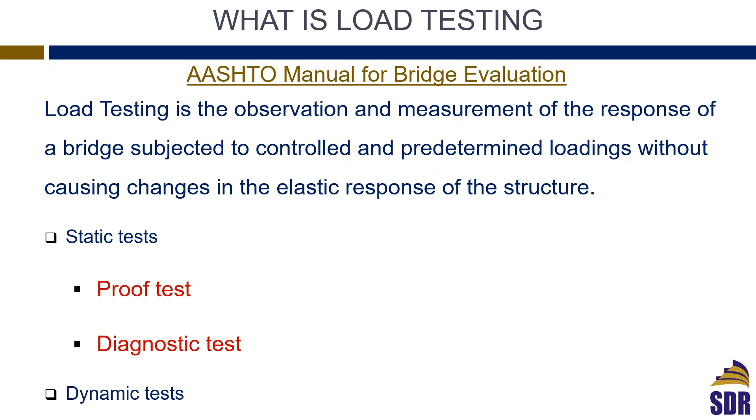So first of all, what is load testing? According to the AASHTO manual, load testing means we basically load a bridge with a predetermined load and then measure the response of the bridge under that controlled load to determine its response. Generally, load testing can be static or dynamic. I would say most of the time we end up doing the static test. The dynamic test is mainly done for purposes other than proof testing or diagnostic testing, and that's what the statics are meant to be. Why do load testing, or what is the benefit of it?

Basically, when we load test a bridge, we are trying to capture the actual performance of the structure. In other words, we are trying to determine the actual live load distribution between the different elements of the bridge. In addition, we are trying to account for factors we can never include in our design. Many of these factors are like the support conditions of the bridge, the unintended composite action that could happen in reality. Also, some secondary members like the railings, the parapets, the bracings, all these elements can contribute significantly to the strength of the bridge, as we will see today.

Also, unintended continuity, the fixation that may develop at the end of a slab span or a T-beam span, despite that you are designing it as a simple beam, and in reality this simple beam action or the knife edge support that we use in our analysis does not really exist.

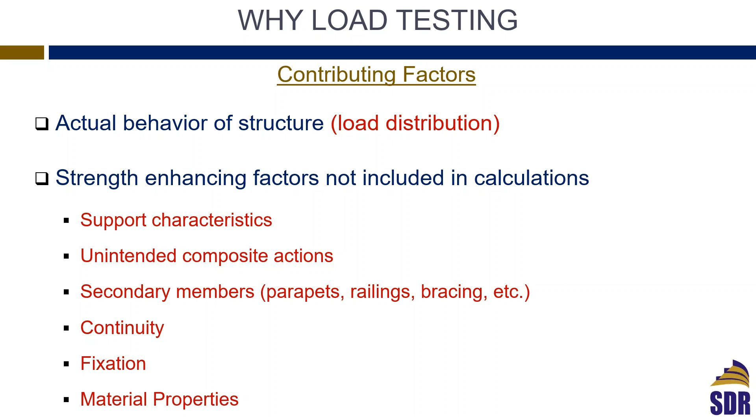And finally, also to account for the actual material properties that we design as 4,000 psi concrete, but the actual concrete strength will definitely be higher than that.

So what are the advantages of having a load test? The main advantage, and this is what we commonly do, is when we have a bridge that failed the load rating and it is determined that this bridge has to be load posted. In other words, we are limiting the actual live loads that can go on that bridge, since it has a load rating factor of less than 1.

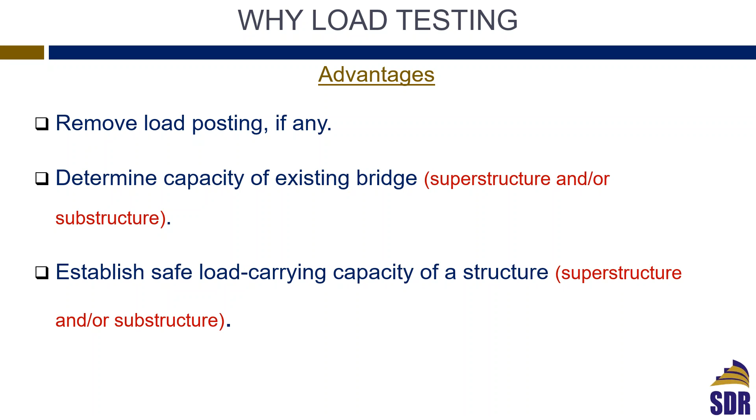Also, we can use it to determine the actual capacity of an existing structure or bridge, to see what is the maximum live load we can pass on it, and also establish a safe load-carrying capacity of an existing structure. Here in SDR, we do this structure evaluation process.

We have developed our procedures based on our extended experience in this area of bridge engineering. We do a condition assessment, and then after that we do our preliminary load rating analysis to determine what are the deficient members - is it the main girder, the floor beam, the stringers, the slab approach span - what elements are deficient that we are going to go test in the field.

After that, we will start with our preliminary finite element analysis. We develop a detailed model, as we will show later, and then go in the field to do the load test, then come back and validate our finite element model, and finally update the load rating analysis based on the findings from the field test.

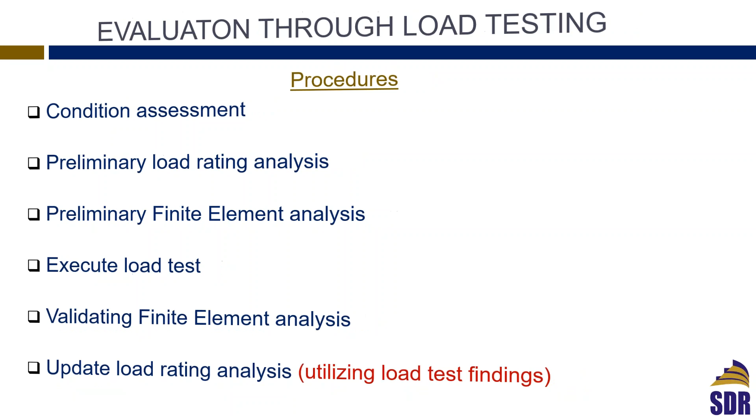So, first step, the condition assessment. As you are all aware, we start by doing hands-on inspection. That's very crucial - you have to go out and do a full inspection of the bridge, whether it's a steel structure or a concrete structure.

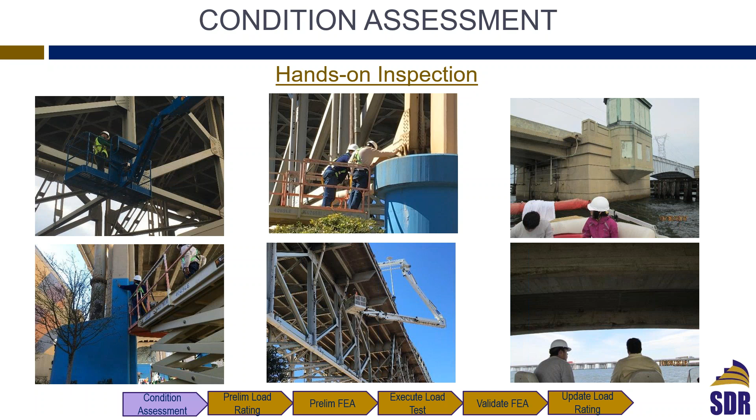As you all are aware, we can do the inspection from above the bridge using snooper trucks. It can be from under the bridge, also using a boat. We can access using man lifts, scissor lifts.

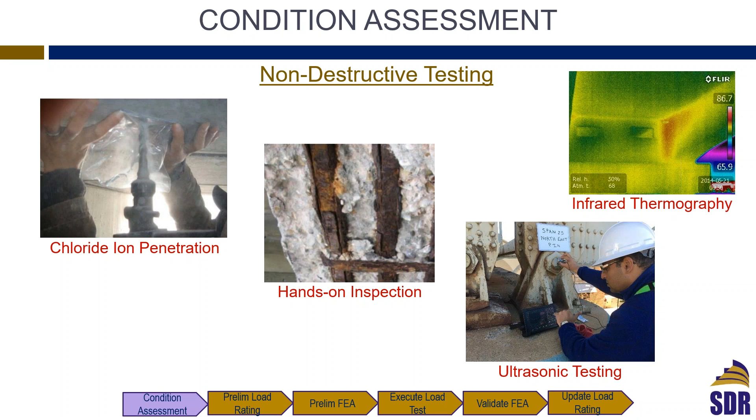Also, sometimes we might need to do non-destructive testing to determine some of the characteristics or material properties, which includes chloride penetration for concrete. Also determine corrosion, ultrasonic testing for steel structures or pins. We can also do infrared thermography.

Now, the second step in our procedures is to come up with a preliminary load rating. This is mainly a conventional load rating analysis, same as what we do for any bridge, using the AASHTO approximate analysis methods, and also using many software packages like AASHTOWare Bridge Rating.

We can do it with Smart Bridge, which is a software that we also develop in-house. It can be with MIDAS as well.

So you do the preliminary load rating analysis, mainly from this conventional analysis, which we typically do for any bridge. You determine what are the controlling spans, which members are the deficient members that we have to go and test in the field, and determine the rating factors of those members.

And most probably when we start, this would have already been in place, because this is meant for posted bridges. So for a bridge to be posted already, this preliminary analysis should have been done using the approximate methods of analysis.

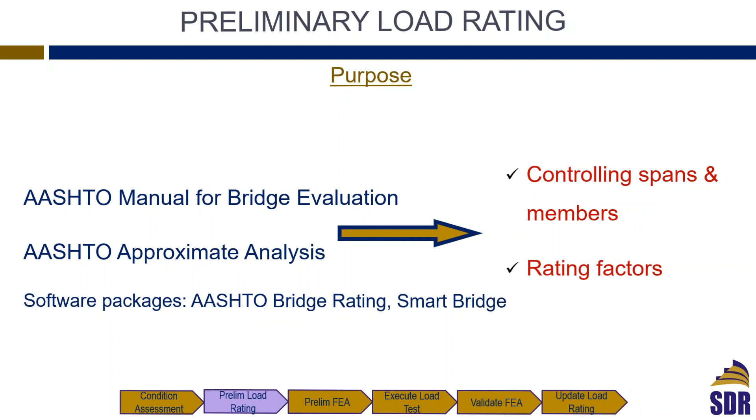After that, before going to do the actual test, we have to start developing our detailed finite element model. At this stage, this model serves several purposes. First of all, it's to determine the magnitude of loads that we can put on the bridge.

We cannot just go in the field and get a heavy truck and put it on the bridge, ending up damaging the bridge while testing. So that's a very important point - we have to determine what is the magnitude of the loads we can impose on the bridge.

Then we have to determine what are the safe limits of deformation and strains. So while we are testing, we have to do on-the-fly verification to make sure that the strains we are measuring make sense or are comparable to what we are expecting. And that mainly comes from the finite element model that we developed before going to the field, to determine what are the expected strains, so we can do a live comparison while testing to make sure the gauges are working properly, we are not overloading the bridge, and the measurements we are taking in the field make sense.

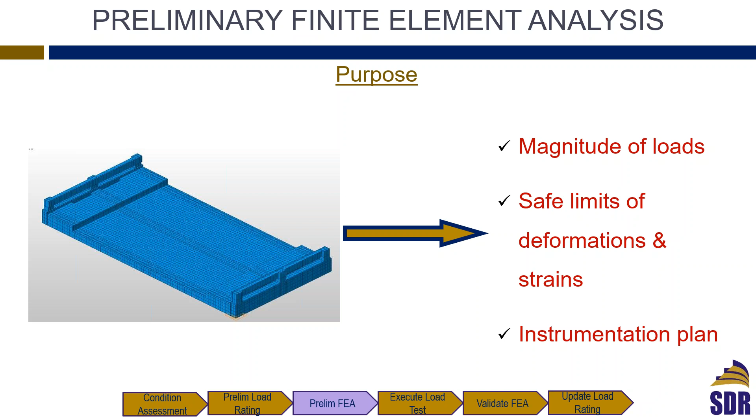Finally, we develop an instrumentation plan by identifying the deficient members to see exactly where we have to place our gauges, whether at the end, mid-span, positive moment, or negative moment. Depending on the deficiency of the member determined from the load rating and the preliminary finite element analysis, we come up with the instrumentation plan for our gauges in the field.

Before going to execute, the finite element analysis has to be fairly detailed. We are trying to capture the actual performance of the bridge or structure as much as we can, so sometimes we end up doing nonlinear analysis and have to consider geometrical nonlinearities. We also use different types of elements, not just grillage or beam elements, but most of the time shell elements, plate elements, and solid elements as well.

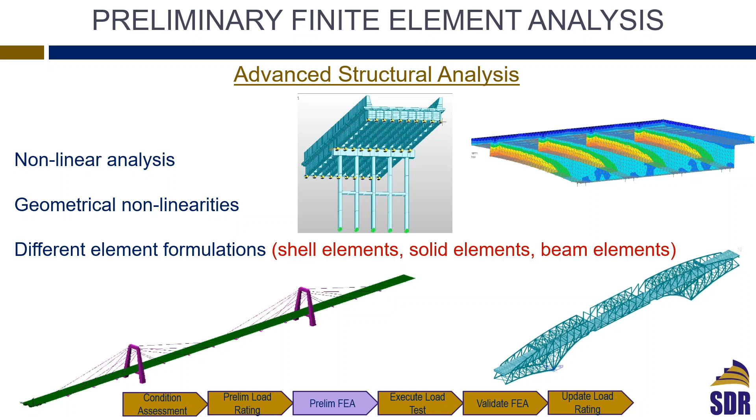In some scenarios, we might even have to consider soil-structure interaction, which is one of the nice features in MIDAS, where you can model your piles or foundation and represent the soil using soil springs. MIDAS actually has a built-in function for integral piers and monopiles or pile-and-column systems, where they represent the soil using lateral and vertical springs based on the P-Y curve method. The lateral springs are nonlinear and the vertical springs are linear.

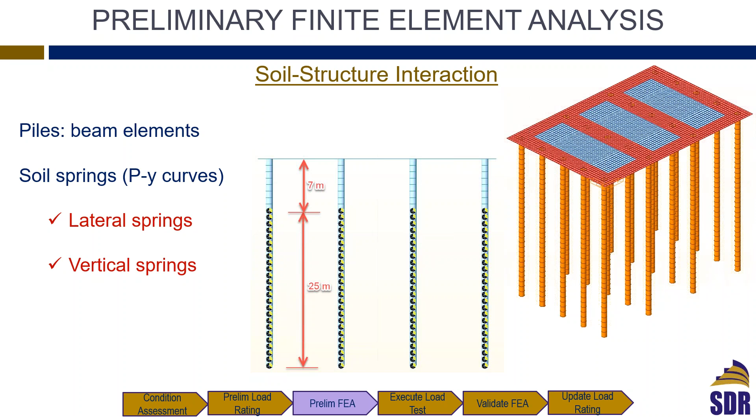This way you also account for the flexibility inherent in the system when modeling the foundation. You'd expect that a column modeled with a fixed base versus one modeled with the pile and soil represented will behave differently. The model with the pile and soil will be more flexible, meaning you might see more deformation, but your internal forces in terms of moments and shears might be significantly less.

Now, after that, we go to the field to load test the bridge. So how do we apply a load on the bridge, especially since these should be heavy loads? Most of the time we use dump trucks. We get them filled with sand or limestone, whatever we can get, and we take those trucks to weigh stations to determine the axle loads and the distance between the loads.

Most of the time those dump trucks were looking at 31 kip load for each axle, with about 4.5 feet spacing between the rear axles, and about 5 to sometimes 8 kip for the front axle. I want to highlight that those 31 kip axles spaced at 4.5 feet are very close to the HL-93 truck.

Actually, the HL-93 truck is 32 and 32 kip, but the rear axles are spaced at 14 feet. However, the design tandem is 25 and 25 kip, spaced at 4 feet. So the load we're trying to put on the bridge is very close to the actual design load of the bridge. In very rare situations, we might also have to use counterweights in addition to the trucks.

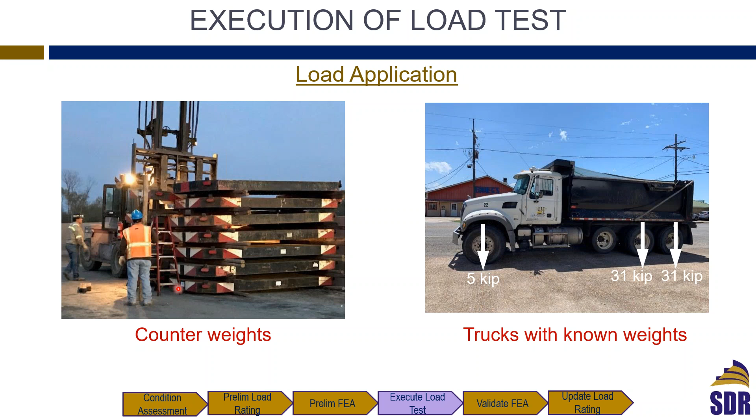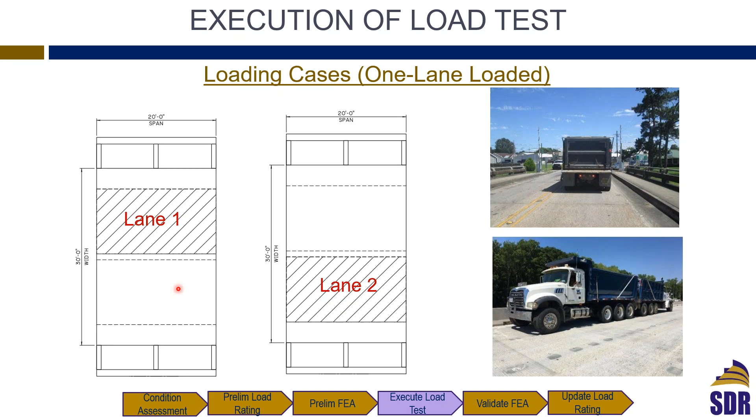Also, when we do the load testing, we have to be mindful of representing the actual design loads. So sometimes we do a one-lane loaded situation, running the trucks in one lane, and then also a two-lane loaded situation, same as we design the bridges for one lane loaded and two lanes loaded.

After we do the field test, for the load, do we go in the field and apply the maximum load on the span? Taking this simple span slab as an example, we're interested in it since slab spans are typically governed by their flexure strength. So we're looking at the mid-span moment for this simply supported slab. Do we go and apply the maximum load on this span to produce the maximum moment at mid-span?

I don't think that's wise. You'd like to apply the load incrementally. But how could you apply the load incrementally? We do this in a smart way: we start moving the load, moving the truck on the span. Your mid-span moment, your maximum moment, is under the load. Once you start moving the truck in and out and getting closer to mid-span, you increase your mid-span moment and your moment under the load. You keep moving the load until it reaches mid-span, and this is what gives you the maximum mid-span moment.

So we are incrementally increasing our load and taking measurements at each step. While taking those measurements, we compare them to what we expect from our preliminary finite element model, to make sure we are not overloading the bridge. The load has to be applied incrementally in both the one-lane loaded case and the two-lane loaded case.

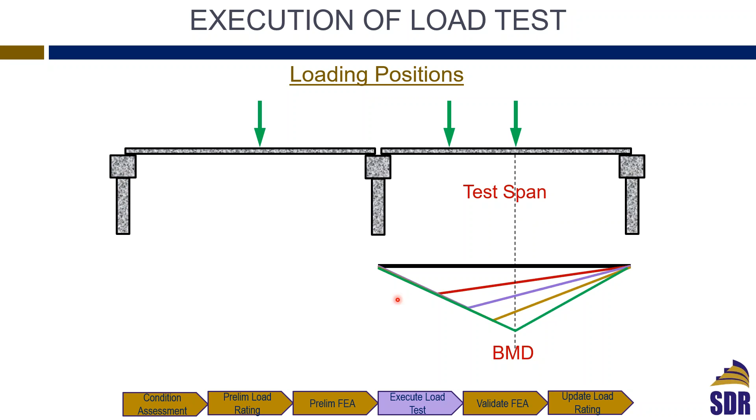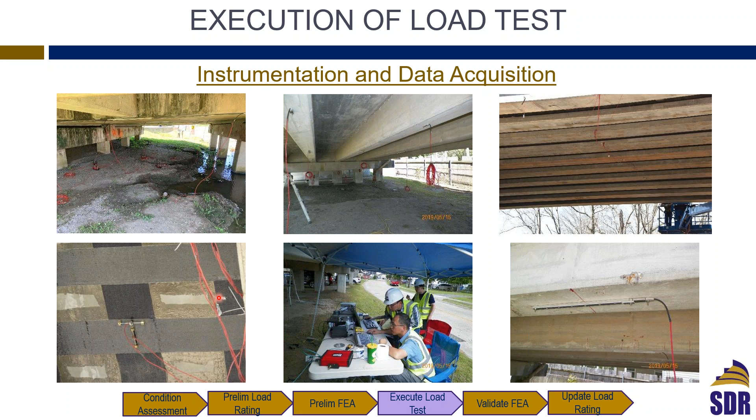This instrumentation looks nice in pictures, but there are a lot of challenges in the field. In some cases we can stand on the ground and access the spans to be tested. For other spans, we have to sit in a boat, or use a snooper truck or a man lift. There are challenges like how to access the bridge and when you can access it. If you're working on a swing span bridge, which can open while you're working, you have to secure all your wires. So there are challenges that come with instrumentation as well.

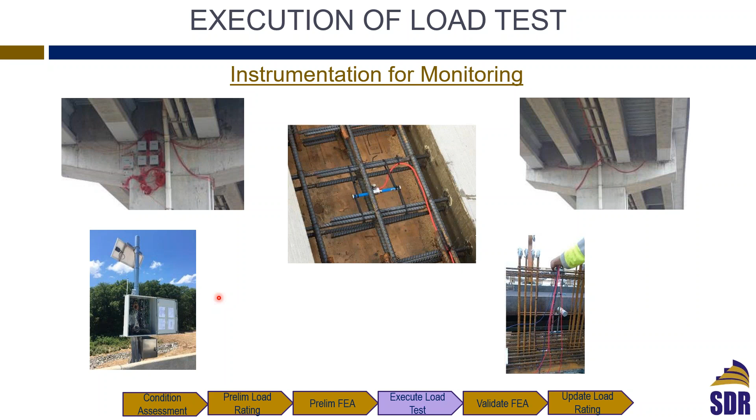Here are pictures of some instrumentation we did on a project, not only for load testing but also for monitoring the bridge over a certain number of years during its service life.

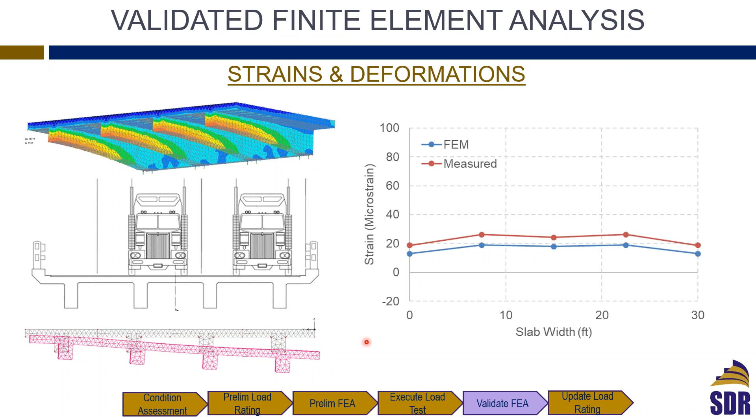After we take our field measurements, we come back and compare the field measurements to the finite element model, validating it by comparing field measurements to finite element strains. We do this by comparing stresses and strains, and also comparing the deformed shape of the bridge to what we expect.

Finally, based on the comparison between the finite element model and the field test, we come back and update our load rating analysis, mainly to refine our structural analysis assumptions to account for the current condition, and also to account for the boundary condition, which is a very important parameter. We might also end up updating our live load distribution factors, which we use from the AASHTO code.

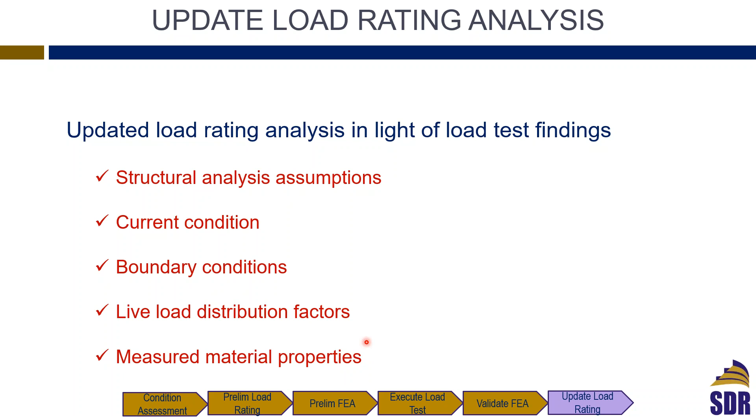These are approximate analysis equations that give you the live load distribution factors. For a specific bridge, we might have to come up with our own live load distribution factors, and also measure material properties if we have to determine material strength in the field.

Now I will start talking about the first bridge I'm presenting today. It's a concrete slab span. To give you an overview, this is a vertical lift bridge, a plate girder bridge that can be opened, and the entire load posting of the bridge was controlled by the approach slab spans. So this entire beautiful bridge is controlled by those concrete slab spans. Load rating the bridge using conventional analysis and conventional load rating techniques resulted in a load rating factor below 1.

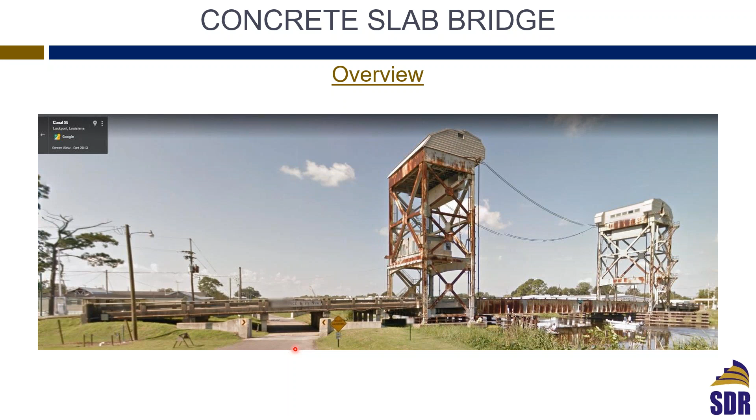Accordingly, the bridge has to be posted. This was an important bridge, crossing over a big canal, and now you are actually hurting the area on the other side of the bridge. So we have to go and do the load testing to determine the actual strength of that bridge and to see if we have to keep it load posted or not.

Just an overview: it has 8 concrete slab spans, each span was 20 feet long. It has 2 tower spans of 30 feet, and 1 vertical lift span that was 150 feet. We were interested in the concrete spans, so we didn't have to test all the spans, and since the 8 spans were identical, we had to load test one of those concrete slab spans.

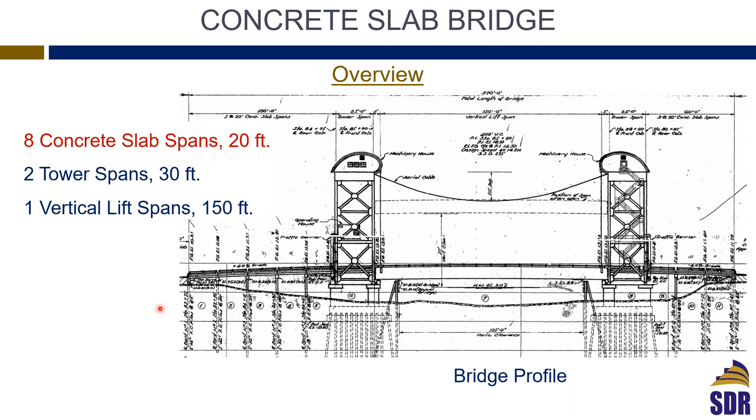To determine which span to test, that's part of the inspection that we do at the beginning. We determine the condition of the spans to see which one we are going to test, look at the current condition, how you can access the spans. There's a lot of parameters that have to be taken into account to determine which span you are going to test, to make sure it's representative of the 8 spans.

This concrete span was 20 feet long, and the thickness of the slab was 12 inches. The bridge has a 28 feet roadway, and a 5 feet sidewalk on each side, and the sidewalk was elevated as well. This was a cast in place reinforced concrete slab. The barriers, the concrete barriers, were also cast in place, and they were cast as part of the deck.

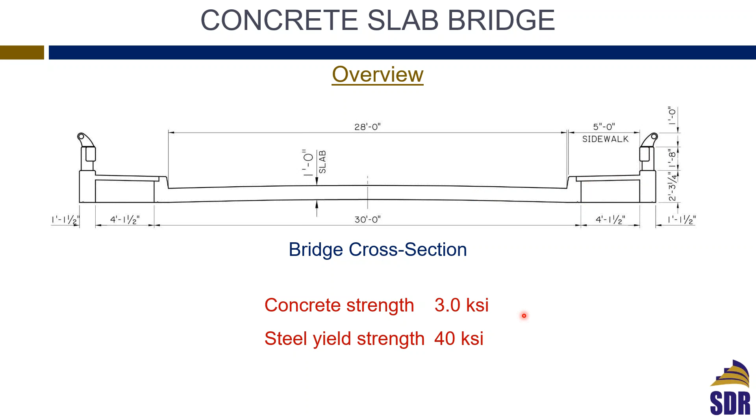This was an old bridge, so we're looking at a concrete strength of 3 KSI, and the yield strength of the reinforcement was 40 KSI. So we start this by developing our finite element model. Typically for the slab spans, we model them using brick elements or solid elements.

Modeling using the solid element is a little more complicated or sophisticated than modeling with shell elements or frame elements, but that's the only way you can capture the behavior of the bridge, given the fact that you have the slab, the roadway, then the sidewalk, which is elevated, and they had diaphragms supporting the sidewalks. The slab at the end is supported on the pile bent.

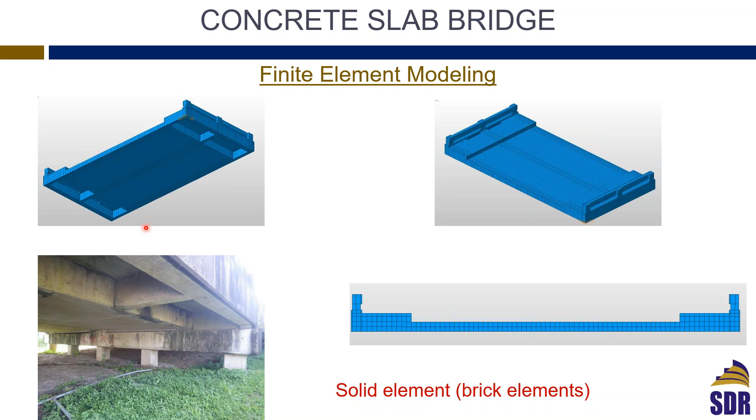So you can see the model we are modeling with the exact geometry for the bridge using solid elements. Even the barriers have to be modeled since they were cast in place, so it's an integral part of the bridge. It's not only the slab, but the barriers, the diaphragms, and everything. This model using the solid element has to match, I wouldn't say exactly, but as close as possible to the actual geometry of the bridge.

Now, the other trick in finite element analysis in general: boundary conditions are one of the most critical parameters that people can play with, and it can significantly change your results. I'm not talking about even structure evaluation, even in design.

Just from a structural analysis point of view, if you have a simple beam with a hinge and a roller, and a uniformly distributed load, your moment on this beam is WL squared over 8, with a hinge and a roller. Just put this beam on two hinges instead and try to calculate your moment and see what your vertical reactions are. Just as simple as that.

That's a challenge by itself. When you put a hinge and a hinge, you will end up having 2 horizontal reactions that will contribute to your moment. Just look at the strength of a beam that is simply supported on a hinge and roller, then go into your finite element model and change it from hinge-roller to hinge-hinge and see what happens to your beam.

So the boundary conditions, I always say, are like a lethal weapon. If you don't know how to use it, you can get results that make you happy, very small moments and shears, and you have beautiful structures. If you don't know, you can also end up having moments, shears, and internal forces that are not representative of reality. So we have to be very careful about boundary conditions, even for new designs.

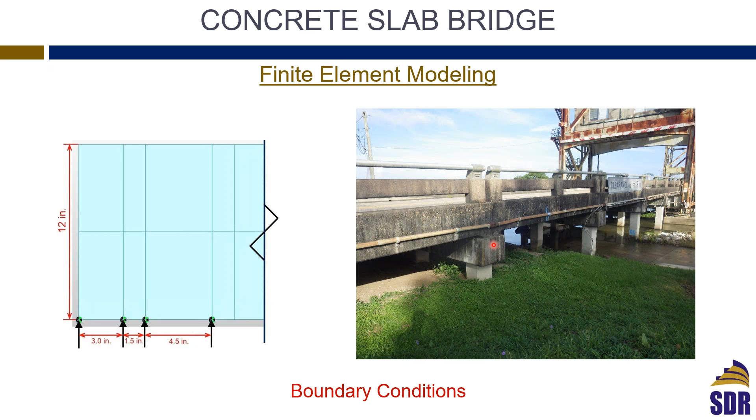But most importantly, you have to make sure you are preventing vertical movement along the area of the slab in that direction, since there was no bearing. This slab was sitting concrete on concrete, so this point cannot move upward or downward because of the bent cap.

Just to show you the instrumentation plan. For this specific bridge, we were instrumenting to measure the strain gauges, or the strains along the entire width of the slab at different locations.

If the span length in the longitudinal direction is 20 feet, the width of the slab was 30 feet. We had gauges at 1/4 of the span, mid-span (10 feet), and 3/4 (15 feet). We also had to measure the strain transversely, and we will show you why we are measuring strain in the transverse direction and not only along the centerline of the slab.

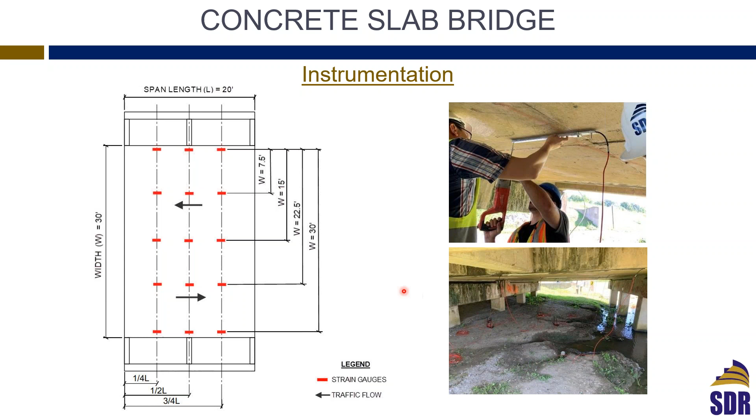Those pictures are showing where we're drilling to put the screws or anchors into the concrete so we can measure the strain in the concrete. This picture shows the wires coming from the gauge to the node, and these nodes are wireless nodes that transmit the data wirelessly to the base station.

The most important message we'd like to convey here is that as the load on the slab increases, the strain we're measuring has a linear relationship with the load, which means the slab is still behaving in the linear zone of the concrete, and the concrete is still uncracked.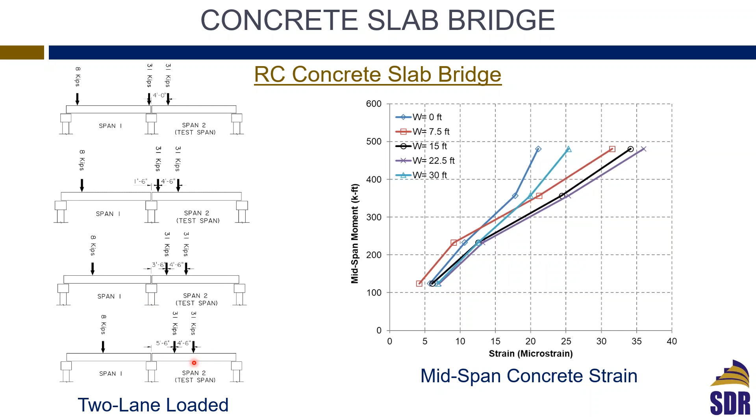You are calculating the maximum live load moment on the span, and the corresponding strain we measured in the field was 36 microstrain. The total dead load moment of the slab is 225, so the corresponding strain will be 17. So your total dead and live is 53 microstrain, and your cracking strain based on the modulus of rupture of the AASHTO is 132. This means that your total strain under dead and live load is less than the cracking strain, and this confirms why we are seeing a linear relationship between the load and the strain.

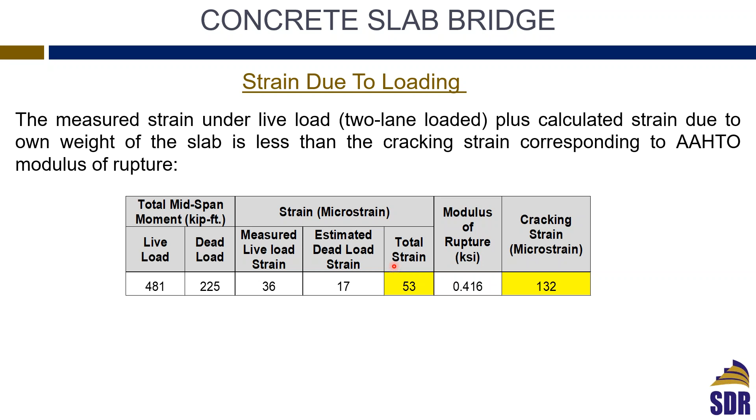So by hand calculations, or if you are following the AASHTO strip method to calculate the strain for this slab, the strip method simply assumes the slab is behaving as a one-way slab in the longitudinal direction, or between the two supports as behaving as one-way, simply supported.

Now, when you start looking at the results in the finite element, as we were expecting, you see that at the end of the slab, this blue contour, which is basically negative strain, meaning you have tension at the top and compression at the bottom. This means that if you took this strip as a longitudinal strip along the slab in the span direction, you would see what we assume as a simply supported beam with a positive moment. In fact, this strip develops negative moment, then you have positive moment in the middle, so it's more close to fixed.

I wouldn't say it's fully fixed, but there is partial fixation, and this partial fixation comes from the boundary condition, which represents the actual seating of the slab. As I said, this is one of the parameters when we design this bridge, we have to assume it is simply supported. That's the easiest way to design the bridge.

However, we are in a situation when we need to look into refined analysis and load testing to see if it's fair enough for this bridge to be posted or not, so we are not underestimating the capacity of the bridge. Based on our extended experience, we have always realized that bridges can carry loads much more than what we would estimate based on code equations.

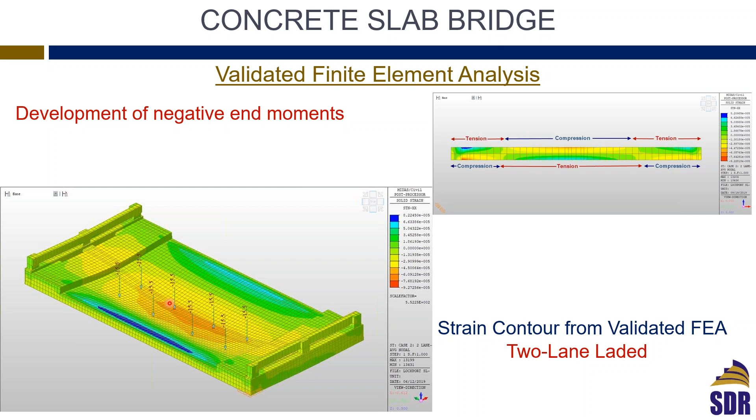And you can see that when we look at the transverse deformation of the slab. This strip is along the width of the slab. If the slab was acting as one-way only in this direction, you would expect that the deformation at the middle of the slab, or at the center line, is the same here, same here, same here, since all the load is running in one-way direction.

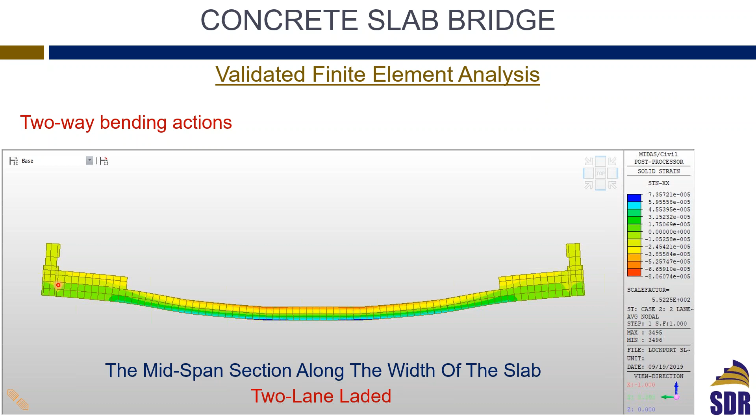Once you look in the transverse direction, you see that the deformation is changing, which means the curvature is also changing in the transverse direction, indicating that some of the load is also going toward the barrier, which then transfers to the support. So you also have a two-way bending action. So now we have two things: the negative end moment and the two-way bending action of the slab.

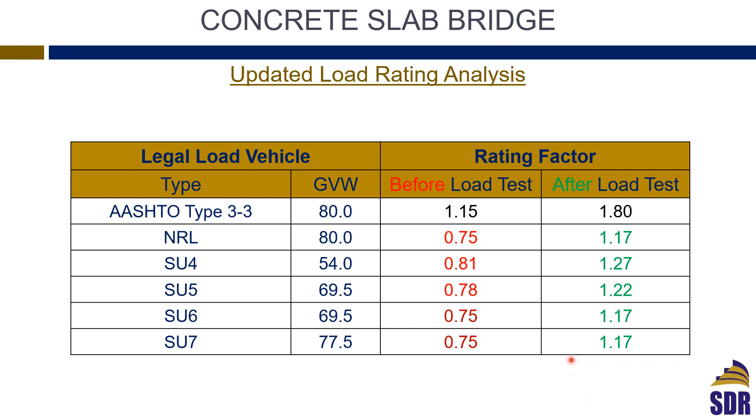Now let me move to the other bridge. I hope I'll remain on time. The other bridge we are looking at, and I'll make it quick so we leave some time for questions and answers, is a reinforced concrete T-beam bridge.

In general, reinforced concrete structures have a lot of redundancy inherent in them. They are not the same as steel structures, and maybe not even the same as precast concrete structures. In reinforced concrete structures, when we have a beam and a column, we simply assume the beam is simply supported and resting on the column, with a hinge and a roller. When we solve this beam, we develop a positive moment of WL squared over 8, as simple as that.

However, in reality, the connection between the beam and the column is a stiff connection, an area, so we cannot assume that this beam is simply supported and will bend as if sitting on a hinge. There will be some negative moment developed at the connection, and even the column will experience some of this negative moment. That's why the beam-column connection is one of the crucial areas we have to design for in concrete structures.

So by nature, concrete structures, especially cast-in-place reinforced concrete structures, have a lot of redundancy in the system. There is a lot of strength in these systems that we don't account for in our original design. Maybe it's not the same as steel structures, but even steel structures and precast concrete structures have a lot of parameters that also contribute to enhancing their strength without being accounted for in the design.

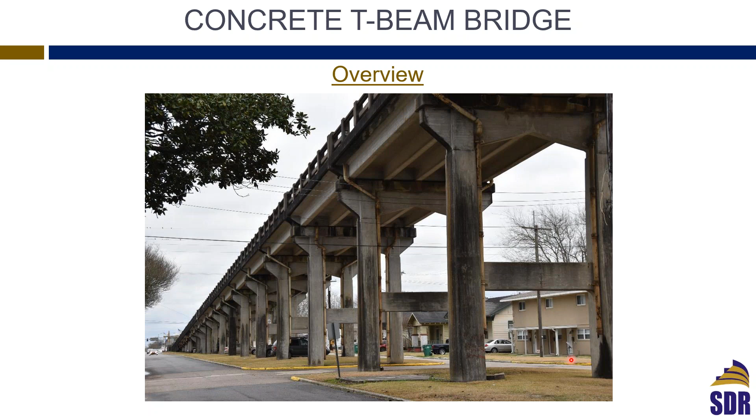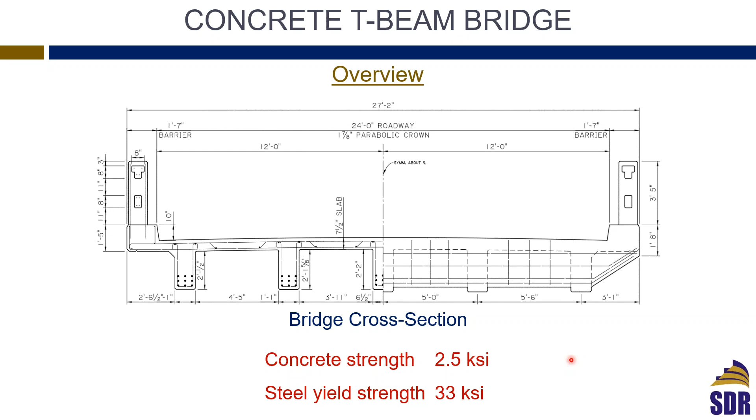So this was a T-beam bridge, a bridge that has reinforced concrete T-beams and a deck slab. The cross-section of the bridge had 5 beams across the width. It has a 24 foot roadway, so it's a typical 2-lane bridge with barriers as well, and a concrete deck that was 7.5 inches thick. It was also another old bridge that has a concrete strength of 2.5 KSI, and the yield strength of the steel bars was 33 KSI.

Again, we have to model the bridge in finite element, and we did that with solid elements or brick elements. Since the barriers were also cast in place and are an integral part of the bridge, we had to model them as well. We even included the cross or end diaphragms of the beams, the sidewalks, and everything, so the model is built to match the actual structure as closely as possible.

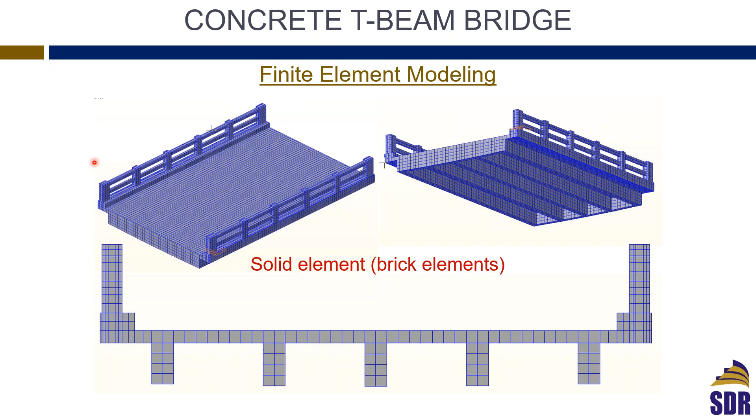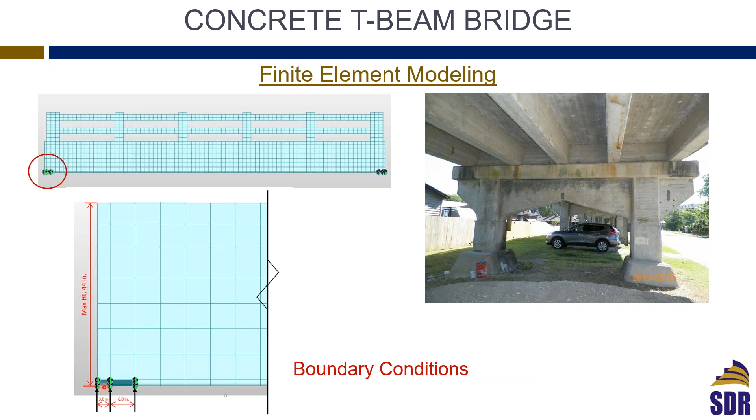Again, if you look, those beams are sitting on the pile bent or the bent cap, but they are not resting at one node. I zoomed in to show you the boundary condition: we had 9 inches of the beam sitting on top of the bent cap, and that's why we are preventing the displacement of the nodes along that 9 inch section of the beam.

In instrumentation for this T-beam bridge, we actually instrumented all the beams along the span.

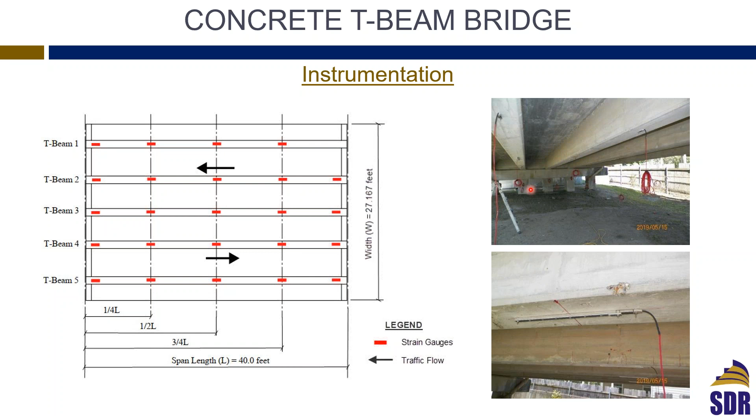So we had instrumentation at the end, quarter span, mid span, 3/4 of span, and the other end, and we instrumented the 5 beams. Just to show you some pictures of the instrumentation we applied on the beams in the field. And then we start comparing the finite elements to the measurements.

For the 2-lane loaded case, these beams had a span of 40 feet. With 40 feet, when you do the maximum position, you can get 2 trucks back to back, as you see here. So we're doing 2-lane loaded, which was the loading case producing maximum moments on the beam. These are the 2 axles of one truck, and these are the 2 rear axles of the other truck, with 7 feet in between. This is what will produce the maximum mid-span moment based on the truck configuration we have.

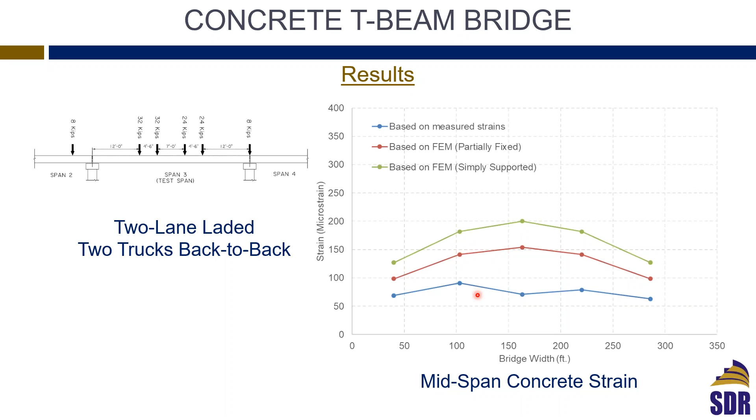So if we compare the measured strain versus the finite element, we also looked into the boundary condition, whether it's simply supported or has partial fixation. As expected, with partial fixation we get closer to the field measurements, indicating that the end conditions are developing some negative moment, introducing partial fixation of the beam. So it was unfair, always unfair, for the beam in the finite element to be modeled as simply supported. You can see this by comparing the finite element to the measured strain in the field.

Just to show you the strain contour, you can see how the bridge is bending under the 2-lane loaded condition with 2 trucks back to back. We're actually putting 4 trucks on the bridge sitting on top under the 2-lane loaded, 2 trucks back to back configuration.

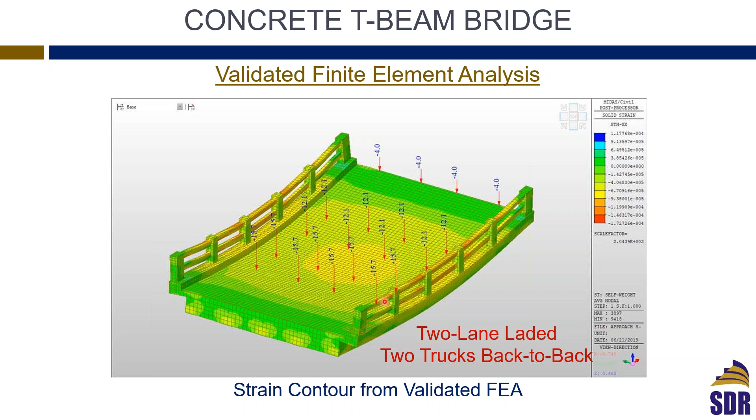You can still see that the bridge will mainly bend in one direction, as we always expect. However, if we look at the strains and the deformed shape, you'll see the bridges always have a dishing action, more of a 2-way bending action. This depends on whether the load is symmetric or non-symmetric, whether you have barriers, and the structure type, but we always assume 1-way bending action. Sometimes this is conservative for bridges, but it depends on the structure type.

Based on what we could develop as negative moments at the end of the beams, you can see that the load rating was 0.85. Now you can go up to 1.23 easily, just by accounting for some of the negative moment that can develop at the end of the beam. In the same sense, it is unfair for that bridge to be load posted, given that it has a lot of strength and redundancy in the system that can take loads much more than what we estimate based on design codes.

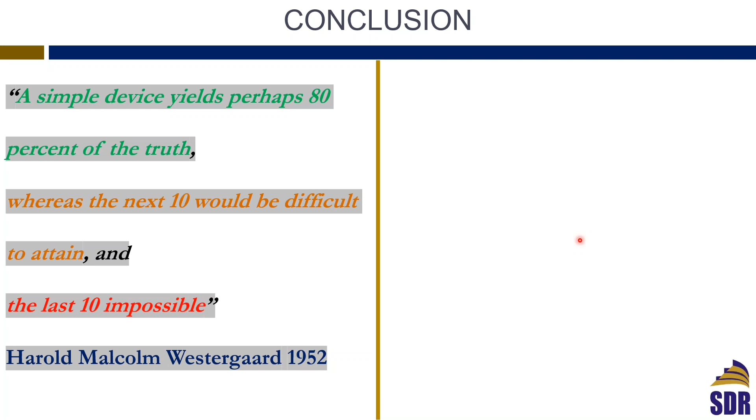It says, a simple device yields perhaps 80% of the truth, whereas the next 10% would be difficult to attain and the last 10% impossible. Back in the days in the 40s and 50s, I completely agree with that, and I still agree with that, and that is the philosophy we're trying to adopt here at SDR. Yes, 80% of the truth comes from a simple device, which is simply the fundamentals of structural analysis.

No doubt I can do design for very good structures if I have a very good understanding of the fundamentals of structural analysis. I think this is what people did when they designed and constructed those magnificent structures we are looking at. Even before they developed calculators, they did not even have computers, there were not even calculators to do the long multiplication we are doing now. Still, they have those beautiful structures that are still surviving up to date. The main reason for that is people had a very clear understanding of the fundamentals of structural analysis.

Now, the next 10% that would be difficult to attain back in the days, this is where we are relying now on refined analysis, mainly finite element analysis for structural engineers. And the last 10%, impossible, we cannot get the real behavior of a structure, and that's why we are doing the load testing. With load testing, you can reveal the actual performance as much as we can to account for the parameters that are impossible to account for in the design phase. So that's the way I see things.

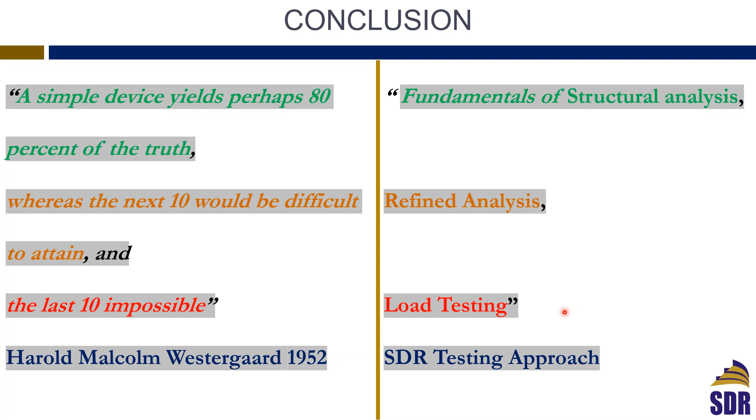By this, I would like to conclude my presentation, and thank you for your attention. I'll be happy to answer some of your questions as long as time allows us to address them. Thank you, I think you can take over now.

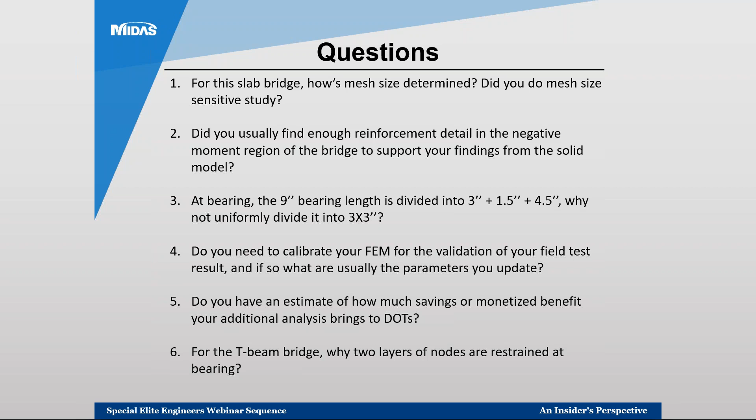Question number 7: you said that the loads the bridge can take are much more than what's considered. Are you accounting for the factors of safety included in design as well?

Yes, absolutely. As I showed you, when we design a slab span, we assume the slab span is just behaving as a simple beam. That's the strip method: a simply supported span, supported on the two ends. But you have seen that now you have negative moments, and also two-way bending action.

So this moment that you are designing for, which is WL squared over 8, does not really exist. In other words, you design for 100 kip feet, whereas the actual moment under this specific load is, let's say, 60 kip feet. So you have those additional 40 kip feet just coming from your method of analysis. Other than that, all your safety factors—the phi factors, the ultimate load combination factors—everything else is the same. I meant that they can take even more based on your analysis assumption.

Question number 8: have you load tested any parabolic RCT beams? If so, how did the results rate using AASHTO?

Yeah, we did. We had one big bridge, the US 11, which I had on the cover sheet. This is a big project we did—several miles long, with 700-something spans of reinforced concrete, curved or arched T-beams. We did finite element analysis, both linear and nonlinear. And even with the nonlinear analysis, the capacity of the bridge for these curved or arched, parabolic beams, as you're saying, is way more than that.